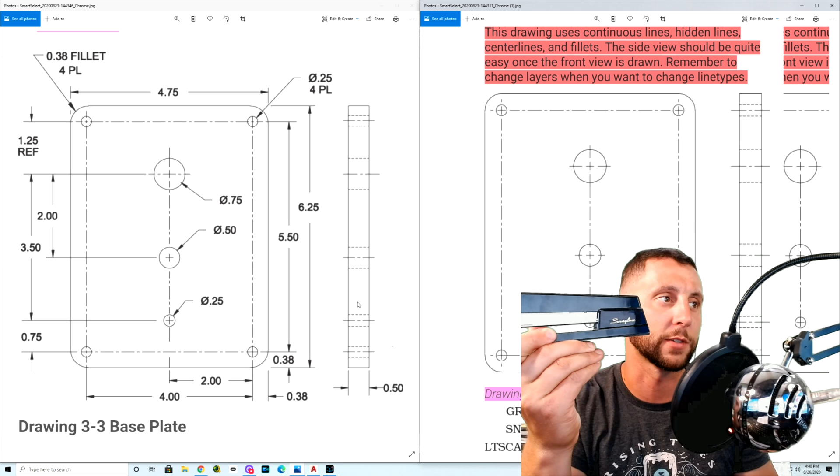This is a project that's using orthographic projections, okay? What that means is that we have the front of the object and we're going to draw the right of the object as well. So if I were to use this as an example, that would be the front side of my stapler, that would be the right side. Now hang on, I'm worried my camera is facing the wrong way, but basically if you have the front, to the right of that would be your right view, if you had the front, above that would be your top view, okay?

So it would be like taking this and just kind of flipping it to be the top or flipping it to be the right. Now again, this may look like I'm flipping it left because my camera is probably a mirror, but you guys understand what I'm talking about, okay?

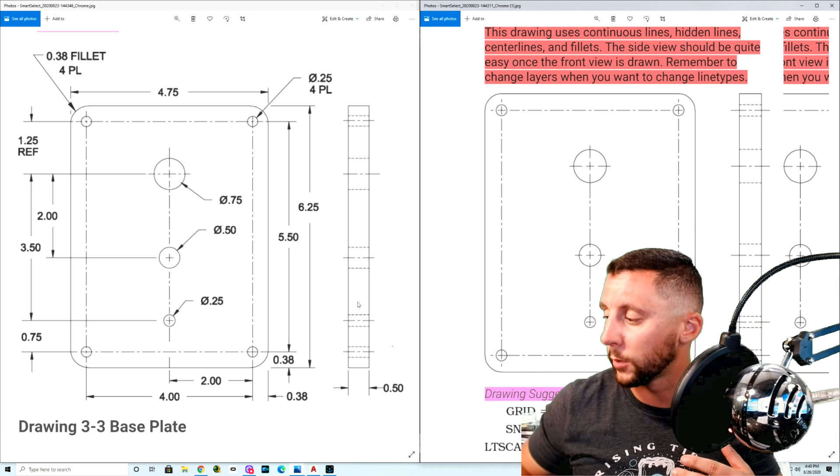Alright, so we're going to create this. We have a plan here that has all of the measurements and dimensions that we're going to need in order to make this, and we also have some other things giving us some information about what we need to do in order to create this drawing, okay? So these are suggestions. You can draw it this way or you can draw it my way. I'm going to kind of show you both and see what you guys like the best.

This says this drawing uses continuous lines, which are basically just your regular drawing lines. Hidden lines. Hidden lines are basically like, I have a drill hole here, so this is a base plate, okay? It's made out of metal. There are drill holes that are drilled through the entire base plate. So if I had a drill hole here, in the right view, the bottom of that circle is going to give me a hidden line and the top of that circle is going to give me a hidden line.

And it's showing me that this drill hole is actually going through from the front of the object to the back of the object. Now you'll notice that on the other ones you'll have one there and up top of that circle there, top of this circle, bottom of that circle, top bottom, top bottom, top bottom. Those will be the same. So you have two of them that you're looking at here and they will both line up with each other, okay?

Center lines, okay? Center lines are the lines that are showing the centers of these drill holes or of these circles. So this is a center line going down this way, that's a center line, center line, center line, center lines all the way around, okay?

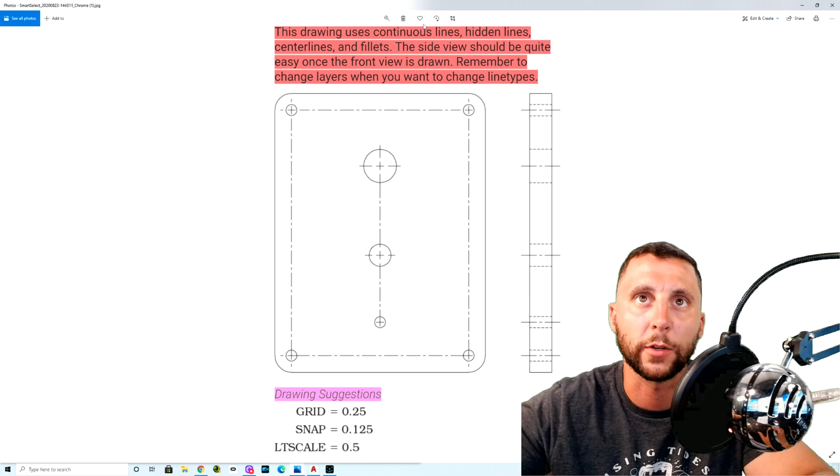Actually, there's a third one. So this one says, study the dimensions carefully, and I know you guys can read this, but I got to read it for myself because I haven't done this project yet. Study the dimensions carefully and remember that every grid increment is 0.25. Okay, so let's stop there for a second and go back to AutoCAD. What you're going to do, if you would like to draw this way, is you're going to type grid, and you're going to do 0.25.

And what that does, I'm actually going to change it back to 1. Watch my gray grid in the back here. These are 1-inch boxes now, okay? No matter how far in you zoom or how far out you zoom, they equal 1 inch, okay? In this project, it's a suggestion that you create 0.25 grids, which every one of these is 1/4 of an inch.

They also want you to use snap points, and the snap points not on the grid are exactly halfway between grid points. So that's going to be confusing right now for a second, but if we go back to this other picture here, nope, not that one, this one, it'll say the grid was 0.25, the snap is 0.125. This is 1/4 of an inch, this is 1/8 of an inch.

So what snap does, I've never done this in a video before because I don't really draw this way. If I type snap and I do 0.125, what it's going to do is, if I'm in the line or some kind of create tool, it'll skip along on basically like an invisible snap grid, and every time it snaps, that's 0.125. It's 1/8 of an inch, okay?

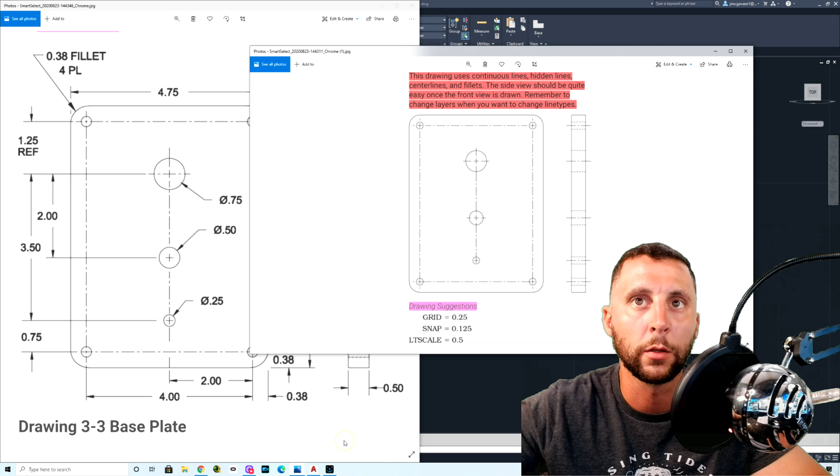Okay. So let's go back to this one again. Nope, not that one. This one. And see what else it says. So it says, and snap points not on the grid. So if it doesn't hit the grid, that means it's not every 1/4, it's every 1/8. Okay, so that's pretty self-explanatory. Alright. Let's see. Halfway between the grid points.

The 4 circles at the corners are a 0.38, actually 0.375 rounded off. So I'm probably going to create those at 0.375 over and in from the corner points. What that means is, sorry, I've got so many things open here. Looking right here, from the very bottom line of this base plate, 0.375 up gives me this center line here, and 0.375 over, which is 3/8 of an inch, is going to give me this center line here, and that gives me the position and center of these drill holes.

Okay, the outside fillets are also 0.38, but I'm going to make them 0.375 because it said that it was rounded. If, and I think her name was Christina or Christy, if this was your project and you wanted to create 0.38s, then just substitute that number in for every time I do 0.375. Okay, but I like to be more accurate. I don't like to round things. Because this is architectural type work, and as far as I'm concerned, it needs to be dead accurate.

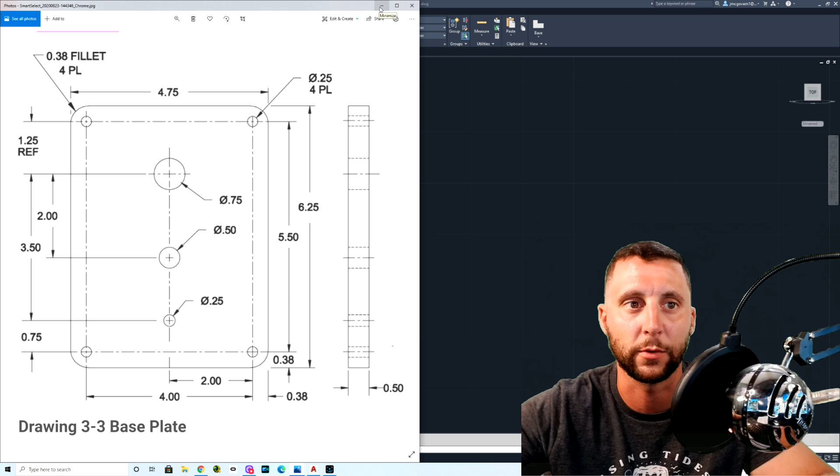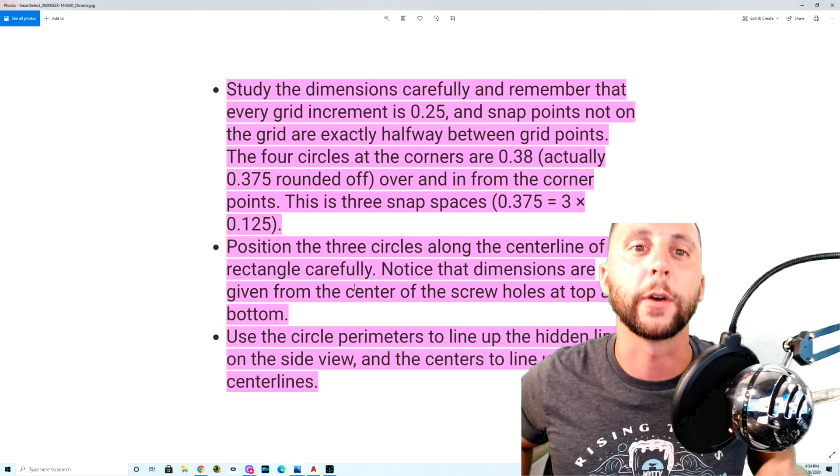All right, so let's get rid of this, and let's go back to our instructions. Okay, so over and in from the corner points, this is 3 snap spaces. Position the 3 circles along the center line of the rectangle carefully. Notice that dimensions are given from the center of the screw holes at top and bottom. Okay, so that's, again, pretty self-explanatory. Use the circle perimeters to line up the hidden lines on the side view. Sorry, my camera's in the way. And the centers to line up the center lines.

Okay, so what that's talking about is between the front view and the right view, just like I was saying before, you're going to use the edges of the circles to give you your hidden lines, and you're going to use the centers to give you your center lines. Generally, I do this center line a 1/4 of an inch past the object. Not sure what that professor is teaching, but that's the way that I do it and the way that we do it in class.

Like this right here, I would have continued that to here and then gone an extra quarter of an inch.

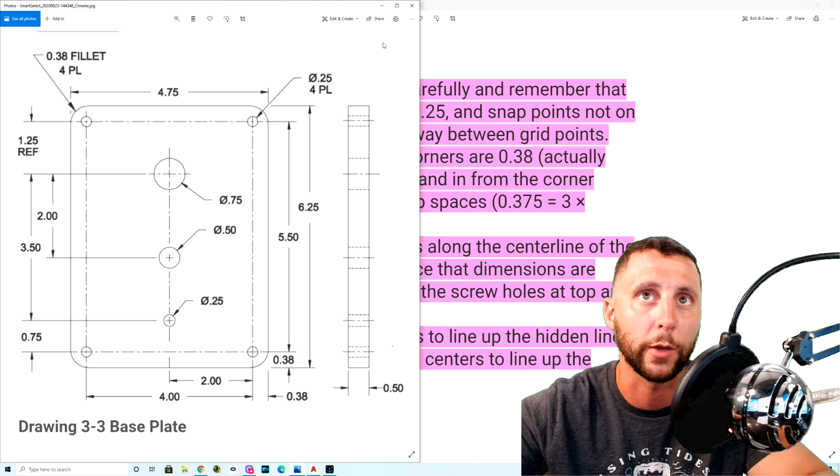Okay, so let's go ahead and start drawing. Let me see what else I'm going to need, I'll have that on my other screen and bring it over when we're looking at stuff. All right, first things first, I'm looking at the outside dimensions.

This is 4.75 by 6.25. Follow the edges of the dimension and make sure it is what you're looking for. Generally, with dimensioning, the furthest out dimension, if there's 2 or 3 lines, is usually the bigger numbers — your max width by max height. So, 4.75 by 6.25.

So again, you could do 4.75 like that, and zoom out a little bit. Now, if you're stuck zoomed in too far, hit escape and double click the scroller. That's a zoom extents, and that's going to readjust your zoom so you can zoom out a little and see some stuff.

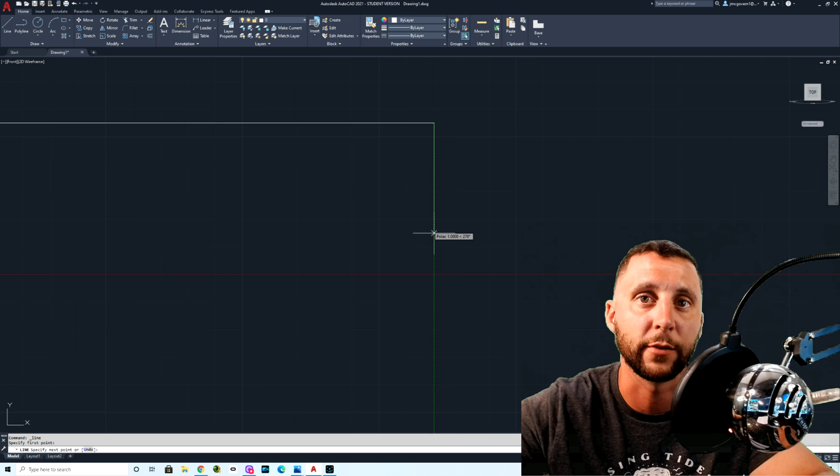Or if you really want to do it their way, and I don't really want to, but I'll show you — this is an eighth, that's a quarter, that's a half, that's three quarters, that's one inch. You can see how long this would take to do. So if I wanted to go 6.25, I'd have to keep counting all the way to 6.25 and then click my line, which I'm not going to do. 6.25. Okay, the other one again was 4.75, and then we're going to go back up and close.

Okay, next thing I would do is fillet — R for radius, or you could click radius down here, that's up to you — and you're going to make those 0.375, or 0.38 if that professor is looking for you to round things. Then you're just going to click from here to here, hit spacebar, that brings you back in, here to here.

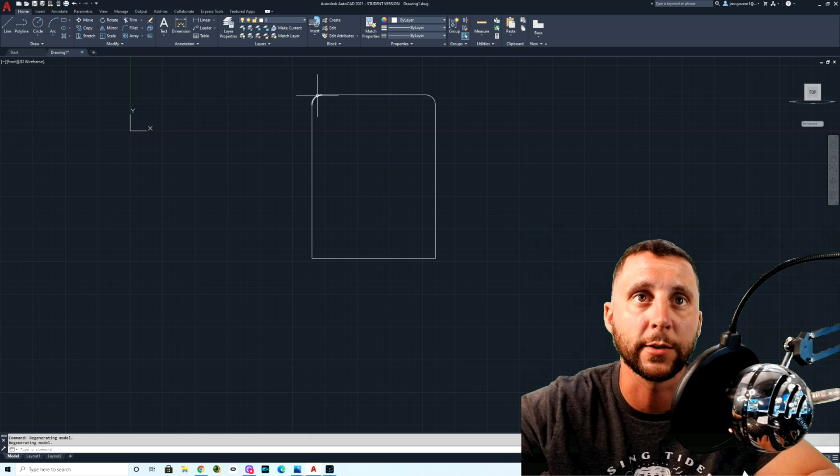By the way, I'm just zooming in and out on the scroller. I'm clicking and holding on the scroller to pan, and then zooming in. The cursor will zoom in to where your cursor is when you're scrolling up on the mouse.

All right, so back down here, fillet, radius, 0.375. Here's another fillet trick — if I just hit multiple, then it will allow me to do 1, 2, and I don't have to hit spacebar now. I can just keep going around, 1, 2.

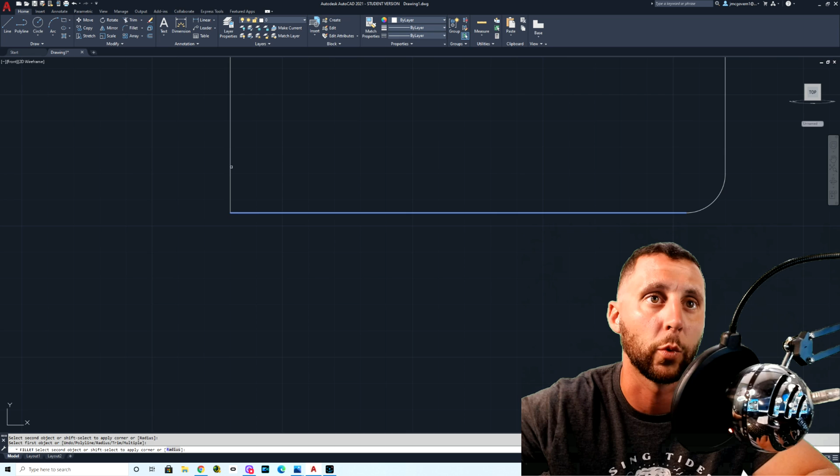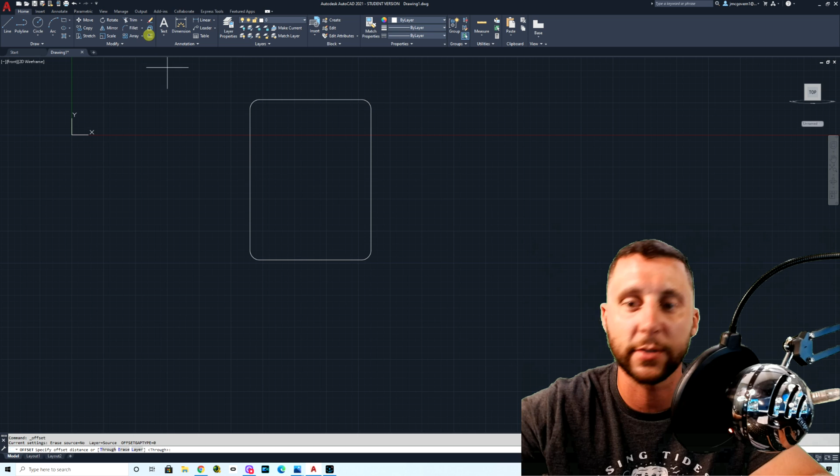Let's do an offset. Oh, by the way, there was another suggestion here that didn't really matter yet — it says we did grid, we did snap, the LT scale 0.5. What that means is if I were to draw a line... okay, we're getting a little ahead of ourselves here. But let's do offset, let's do 0.375, and let's come in on all 4 lines here.

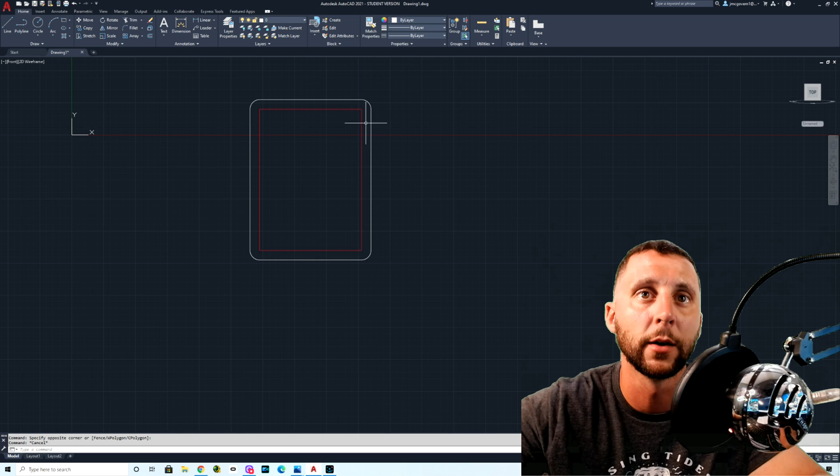You're just clicking the line you want to offset and which way you want to offset it. I'm also going to suggest — I don't want this to get too confusing — so what I might do is take these lines and change their color for right now, just so you know these are going to be hidden lines in a second. I just didn't do them yet.

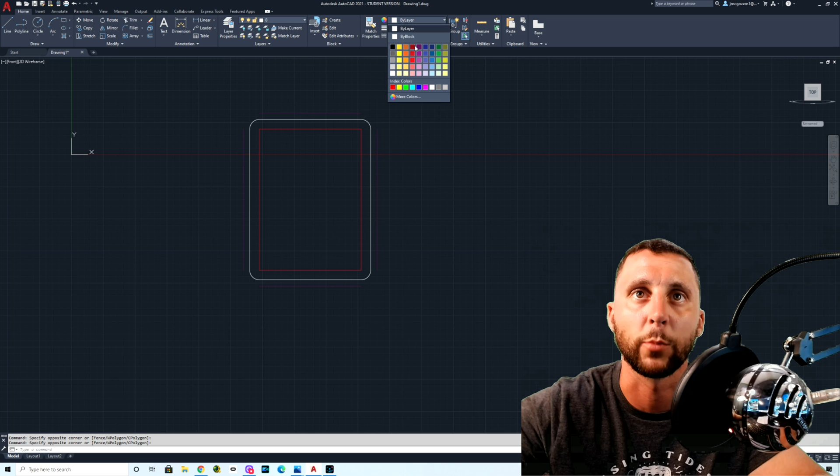Now, offset again — remember I said I like to overhang them by 0.25, so you're going to go 0.25 out, 0.25 out, 0.25 out, 0.25 out. I don't want to confuse the actual edges of the base plate with all these other lines, so again, let's just change these colors. It's very easy to change back, so why not change it so it makes more sense — those can be reddish as well.

Now, why did I do that? If I type EX, enter, and then hit enter again for extend, I can click right here and it will extend — that's called a quick extend. It will extend to the closest object or closest line, and if I do that twice, it will go to the next one. 1, 2, 1, 2, 1, 2, 1, 2, 1, 2.

Now you could also do it this way — extend. What do I want to extend it to? This is not a quick extend, this is an old school extend, I call it. Hit enter. Ooh, I think I messed that up. Extend — what would you like to extend to? Now, why will it not let me select that line? That's interesting.

Generally, when you do this, you would click what you want to extend it to. Huh, that's interesting, I hope that's not a change in this software. That would be annoying. But if you're using any other version, you'd hit extend, and you would just click on what you want to extend it to.

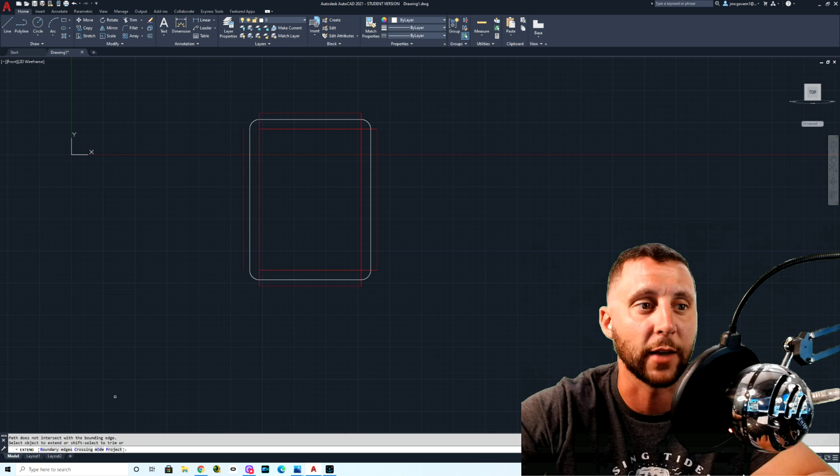You would hit enter, and then you would click what you want to extend. You could also do it this way, where you just grab the blue point here and drag it until it hits that line. That's also another way to do it.

Okay, so now these were pretty much dummy lines, we don't need these anymore. It was just to figure out where those overhangs were going to be. You can change the colors back now if you want. Go back to by layer.

The 4 inside lines are going to be a line type, they're going to be center lines. So how do we do different line types? Right here below line weights is going to be line types. If you've never done these line types before, hang on, let's just make sure we're still recording here. Good.

If you've never done it before, you're going to have to click on Other, okay? And in here, you're going to have to hit Load. Now, this is something that this professor or teacher did not specify. If I have center lines, there's Center, Center 2, and Center x2.

Basically those are different scales within themselves for how big the center lines are. You can see Center x2 really stands for 2x, it's 2 times bigger than the normal center line, which means it's a little bit more zoomed in, okay? 0.5x would be a little bit further zoomed out. So we usually use the 0.5x one, so I'm going to hit OK on that one.

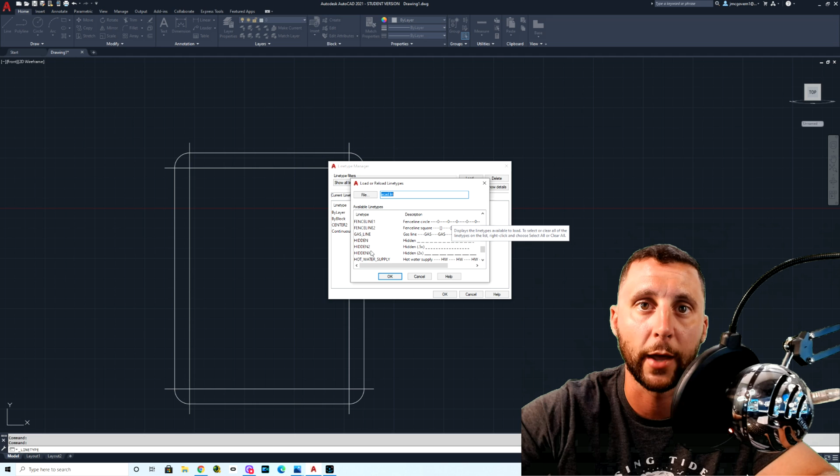I'm going to hit Load again, and I'm going to scroll down here until I see Hidden line, because I want to load that one as well. The 0.5x one, that's just the one that we use in our projects, and then you hit OK.

If you select these 4 lines, by the way, if I click and go to the left, that's a green box. If I click and go to the right, that's a blue box. Green is going to select anything that it's touching and everything that's inside of it. Blue is only going to select everything that is fully inside of it.

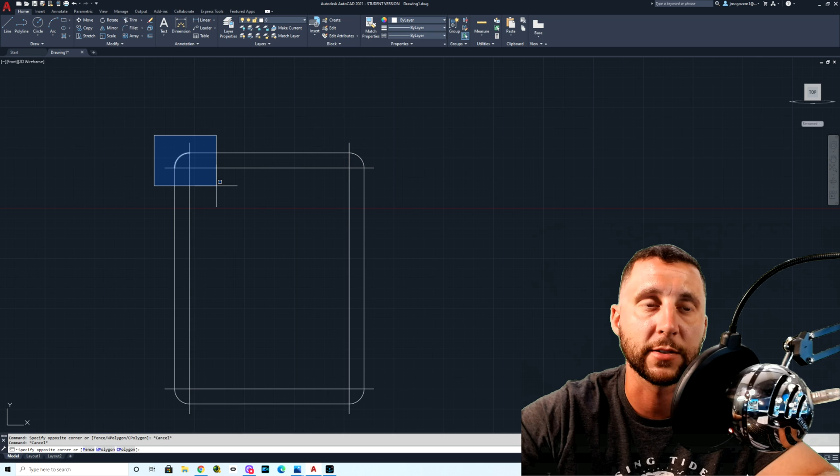Notice how this fillet is the only thing that gets selected when I go like that, because it's the only thing that's fully inside. But if I go like this, I start getting more lines. So again, what it's touching and anything inside of it, versus what's fully inside of it. Alright, so select these 4 lines.

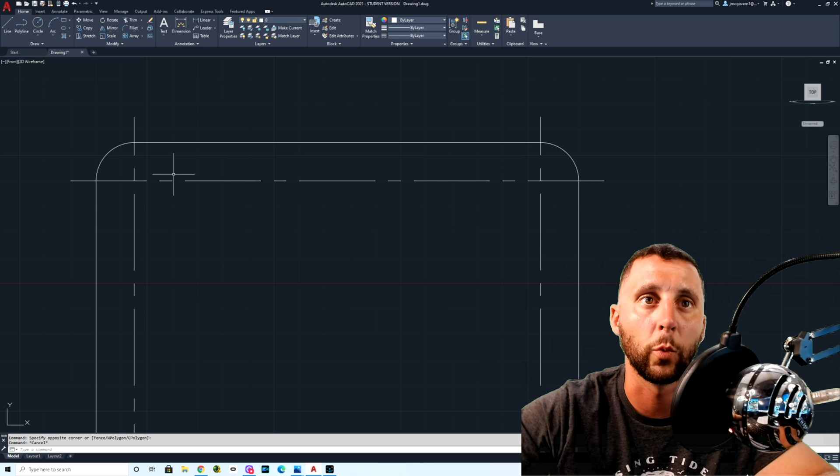Go to line type again and change that to Center. Now notice that there are 1, 2, 3, 4 dashes in this center part here. Looking back at the drawing that we were given, we have a lot more than that. So let's change our LT scale to 0.5 and see if that's the correct line type that this professor wanted to use.

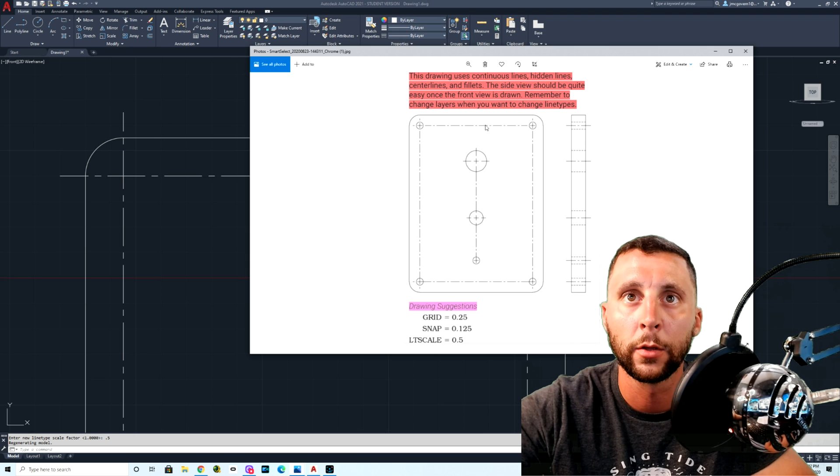Well hang on, you don't have to select anything. LT scale 0.5, and you'll notice that that changes. So it does look like it's correct now. 1, 2, 3, 4, 5, 6, 7. Perfect, so it was a 0.5x that he was using, okay, or she.

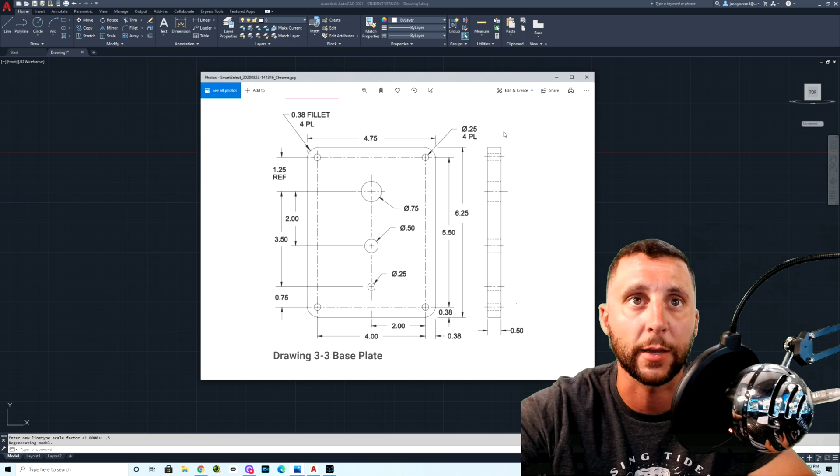Circles. Okay, now we're going to draw some circles. Looking at the drawing again, we have these little baby circles, those are a 0.25, and this stands for diameter. You'll see D 0.25, DIA 0.25, or you'll see the diameter symbol 0.25, it all means the same thing. So a 0.25 diameter circle.

What that means is if we drop this down and we do Center Diameter, we can click here and we can type in our diameter, which is 0.25. We could do that 3 more times, or we can click this one and do copy, zoom in and copy it from the center of that circle.

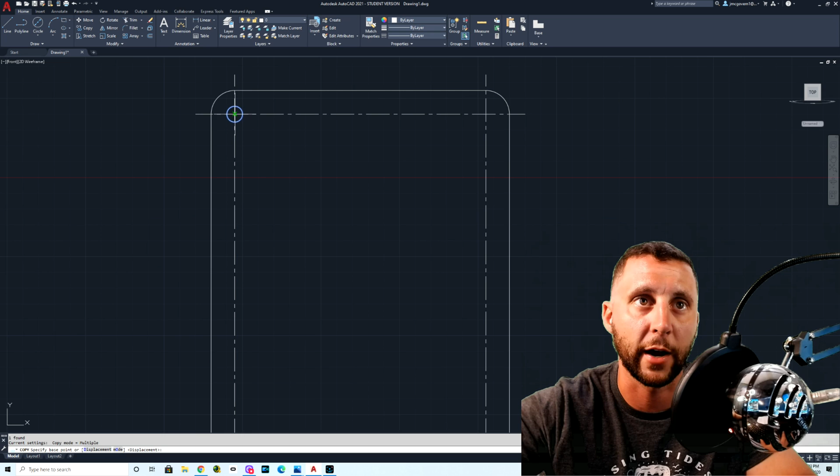If you're not getting the center, hit escape, go back and type OS, enter. Make sure that these are the ones that I always have checked: endpoint, midpoint, center, intersection. I don't really like extension, and that's pretty much it.

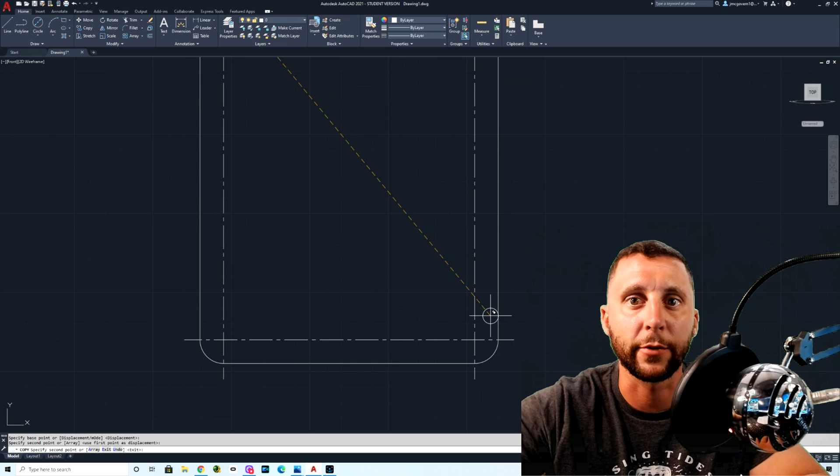So, copy, click at the center, click at these different intersections. Now I don't like how the snapping is, sometimes you get it and sometimes you don't. The snap is very close.

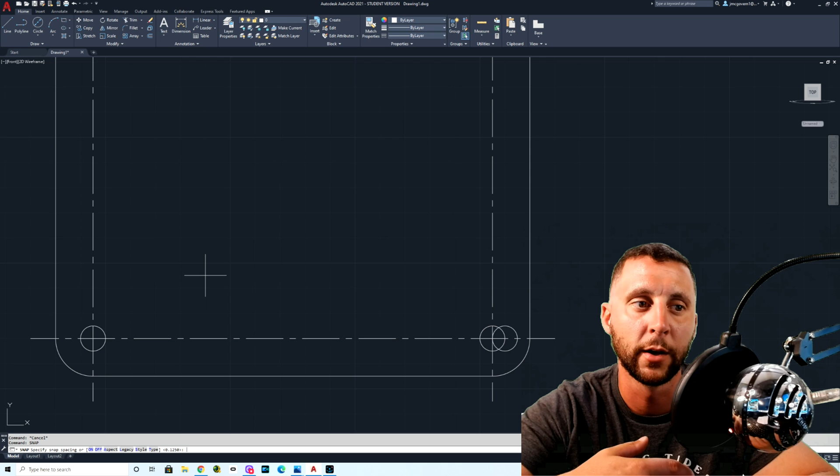Okay, so I'm gonna turn that off now because you guys know how to use it. It just takes a lot more time. It could be a beginner class, I'm not really sure. It's a good way to learn in the very beginning, but it's definitely not very productive in my opinion. I think you can get a lot more done a lot faster if you do it the way that we normally do it. Okay, alright, so delete that.

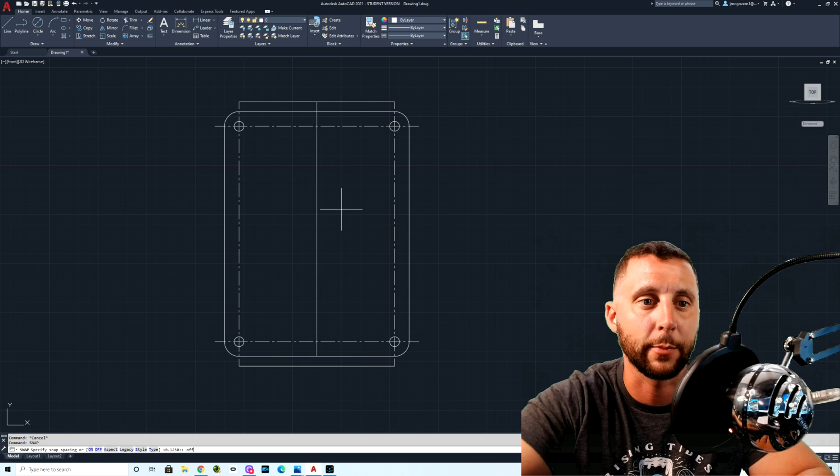Let's see, we're gonna need a line down the middle, so we're gonna go from midpoint to midpoint here. Again, I had midpoint turned on. I probably should have done this before when I had my 0.25 offsets already figured out. This can go to there, and again I'm just going to turn snap off, that's annoying me, and bring this one down to here, get rid of the lines.

Okay, so going back to the drawing again, now see this is, okay, in this picture they have it 1/4 of an inch past the circles, so we can do it that way, that's not a big deal. Let's draw our circles first and then I'll end up trimming that.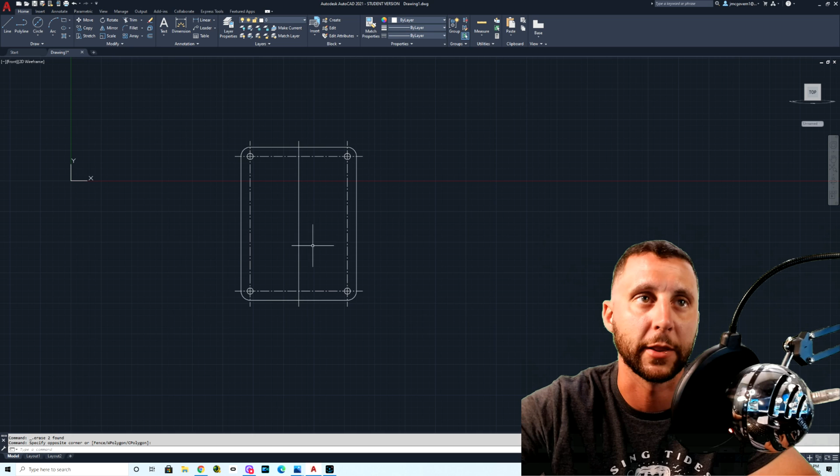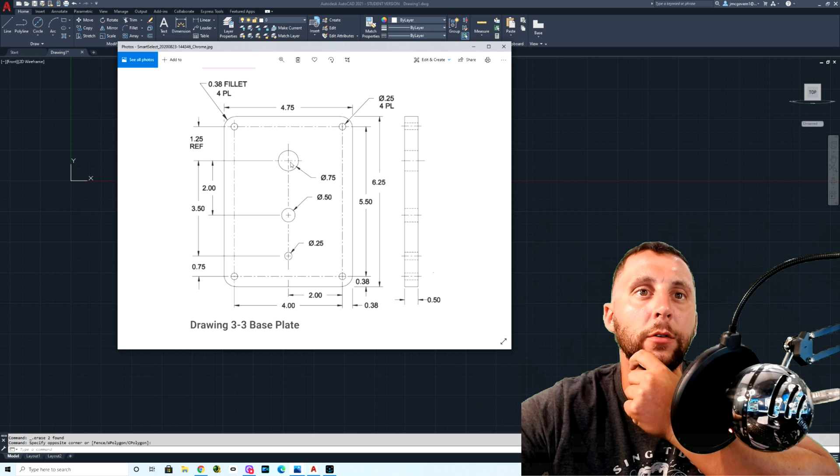Okay, this one circle is, let's see, where is the position of this? From this circle 1.25, from that circle 3.5, from this circle 2. Okay, so I'm gonna do an offset of this line 1.25, 2, and then 1.5 because I'm just doing 3.5 minus 2 here. Okay, so 1.25, 2, 1.5.

1.25, this is an offset. Notice how when you offset a center line, it's going to continue to be a center line. Escape, spacebar, 2, enter. Escape, spacebar, 1.5, enter. Spacebar just brings you back into the tool that you were just in.

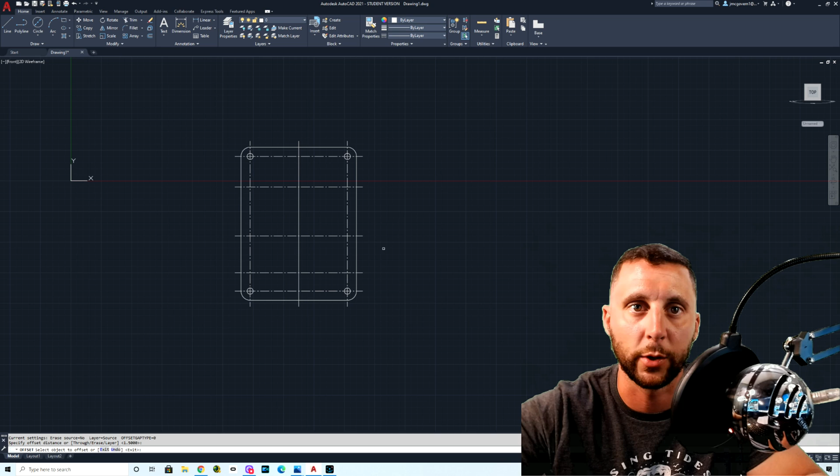With offset though, you still have to type your distance of what you want. Although if I did spacebar and I hit enter, it would just give me the same offset that I was already using. Okay, so now let's draw some more circles here.

This one actually is going to be a center line as well, so let's make sure that that is center 2. We're going to draw some more circles. This one is a 0.75 diameter, 0.5 diameter, 0.25 diameter.

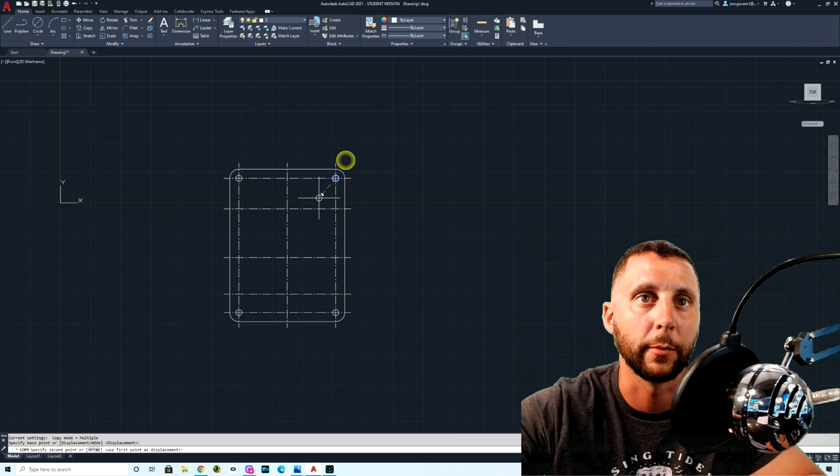We could just steal one of these again, copy, grab it from the middle, put, oop, that goes there. We have another diameter that's going here, and that's a 0.5. We have another diameter up here, and that's a 0.75. Alright, so those circles are done.

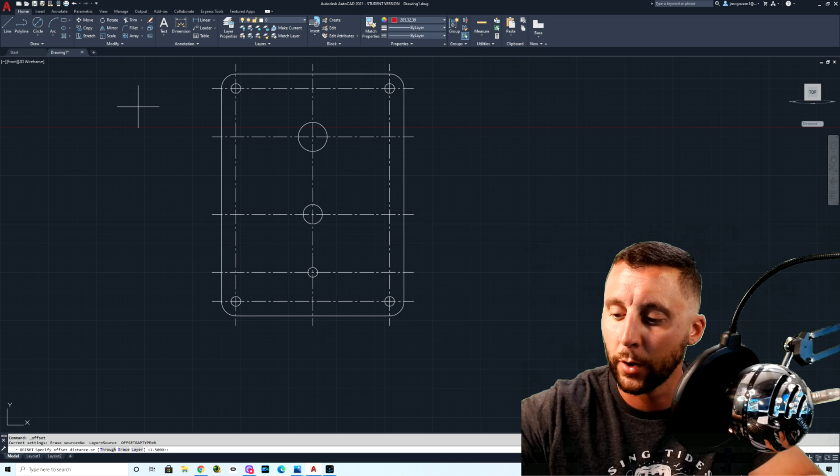Now, I'm going to change my global color right now to red, and I'm going to do offset of 0.25. The red lines are going to be things that I'm going to erase later. Now, that should have created a red line. That's interesting. When you create new things, it would make it red. When you offset it, it's just going to match the properties of what was there.

So that's not a big deal. I guess you don't have to change this. Leave it as by layer. But notice how if I did have that set and I drew a new line, it would make it red. The offset is just going to copy what was already there. So that was a mistake on my part. I'm sorry about that. Offset again, 0.25.

0.25 out, 0.25 out. Now let's change colors just so that it doesn't get confusing. These three outside circles are going to be red. They're going to get erased.

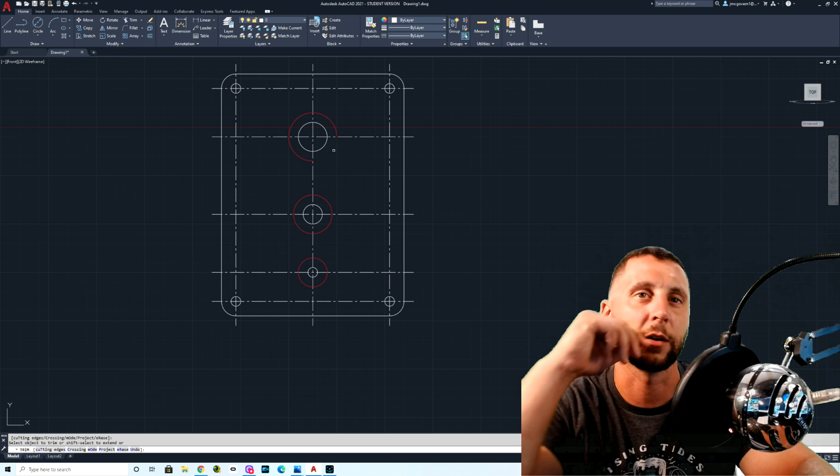I'm going to trim and I'm going to click. Oh, they changed something. I don't like this. Notice how I said there wasn't big changes, but I didn't realize this until now. Immediately starting with the trim command is a quick trim, and I don't like that. Whereas when you hit enter, that's also a quick trim. So it's just something to get used to, which is fine.

But how do you do the other trim now? That's what we need to figure out. This is only if you're using 2021. Everything before this is not like this, okay?

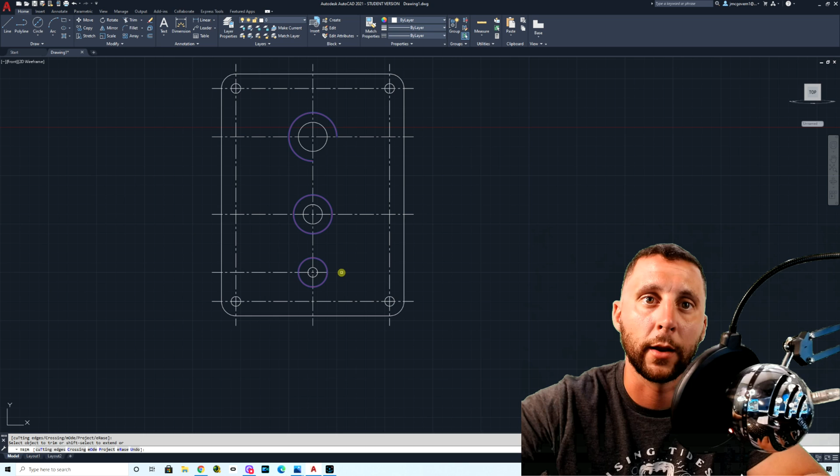Cutting edges. Select the object. Yeah, okay, you gotta hit cutting edges now. That's annoying. Hit enter, and then click what you don't want. Oh, that line is supposed to stay.

That one, that one, that one, that one, and that one. 1, 2, 3, delete. I don't like that about the trim tool. It's going to take some getting used to, but you know, that's what happens. They change stuff. Okay.

Alright, so where are we at here? This looks pretty good. I think we're done.

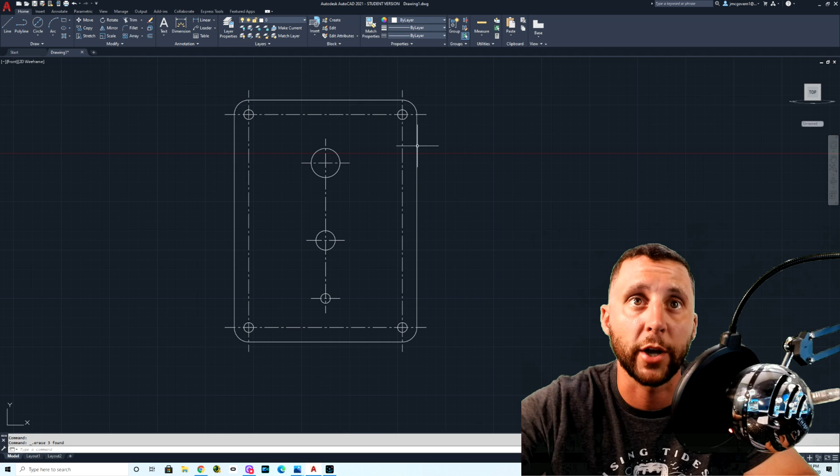This is just saying that there are 4 of those circles. There's 4 of these fillets. We looked at that. If you want to double check and make sure, you can say, okay, from here to here, it's 5.5. Double check that with the drawing. Whoops. 5.5. You can do that all around. That's up to you. If you want to put dimensions on here, I'll put 1 or 2.

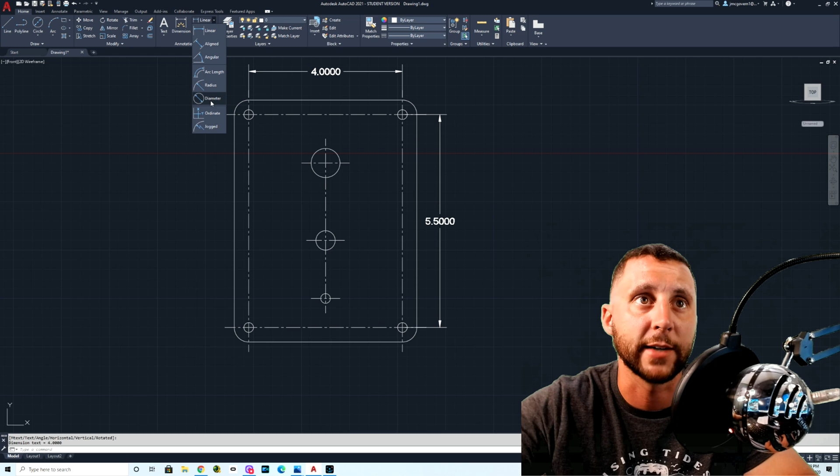That was just a linear dimension. You're just saying, hey, from here to here, and then you just go out and click. That's 4. If you wanted to do a diameter dimension, you would click the circle and you would just say where you want the text to be. Notice how you get that little thing there. If you don't like that symbol, double click on it, click back inside. Sometimes you can't click in there, so you have to actually arrow over. And then see how it's still highlighted right now.

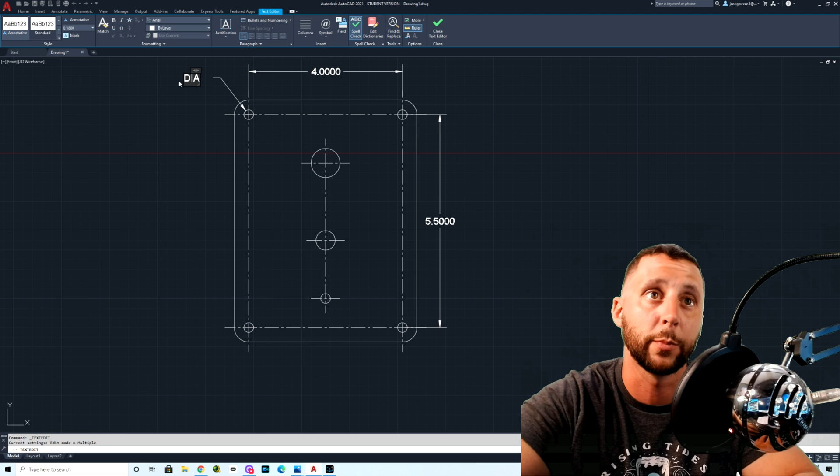I don't like that, because you should be able to just change this part, but you can't do that. You have to change the whole thing. So you could put DIA 0.25 inches or whatever you want to do. Notice how in this drawing this is just 4.75, and sorry, that was supposed to be the outside. But look at these numbers here. They are just 4.75, 0.75. They're not fractional. They're still decimal, but they also don't have 4 zeros afterwards. I want to keep that.

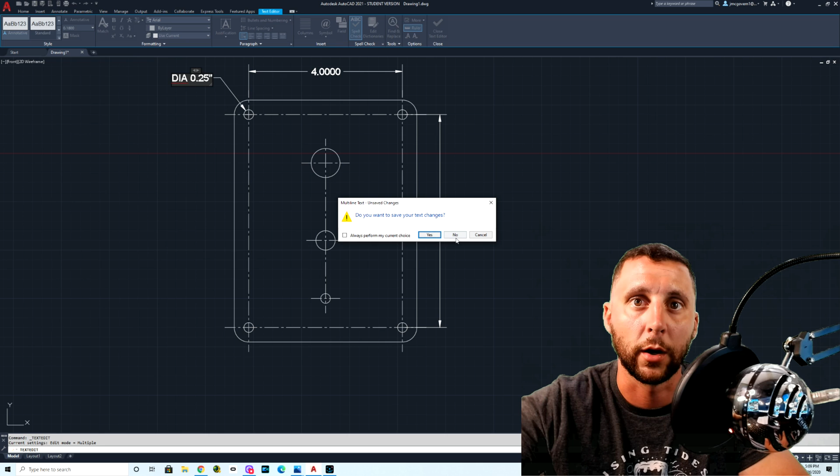So what that means is we have to go into our DDIM settings. We have to hit modify if we're trying to get it to look exactly like that drawing. Symbols and arrows, I would make this 0.25. Center marks none, because we made our own center marks. We don't want to have the system put in its own center marks, because then there's going to be 2 center marks, and it's not really the same. It's better to do it by hand like we did it.

Text height 0.25. This is just the numbers that we use. Fit, always keep text between the extension lines. What that means is that if there's a really small dimension, sometimes it likes to put the number outside and point to that area. I don't like that. I like to put it in there anyways, even if it doesn't fit, and then we change that number to be a little bit smaller if it doesn't fit.

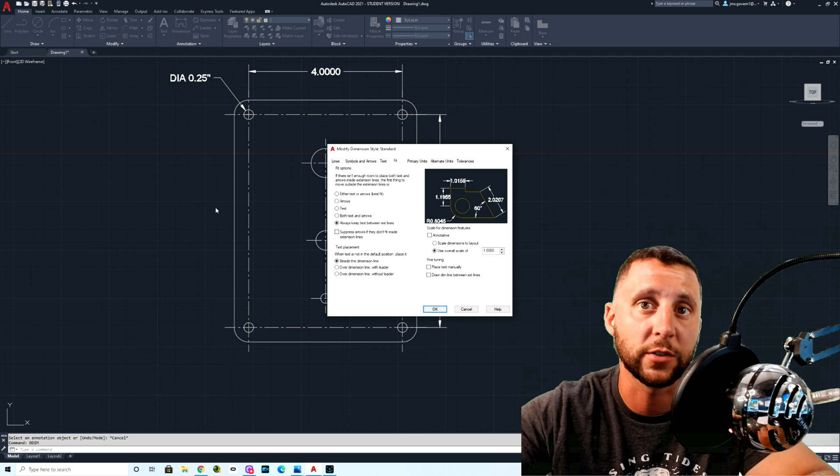Primary units, decimal's fine, but it looks like we're set up like this with rounding. So that's probably why that drawing says 0.38 instead of 0.375. Then hit OK and hit close. All right, so you notice everything is fine now. So that's done.

How do we do the right view? This is going to be pretty easy. You just need to figure out what the depth is. Whoops. Let's go back to this. It gives you a 0.5 depth. And it's going to be the same height. Let's see, the stapler is not a great example. Well, okay, we'll use it.

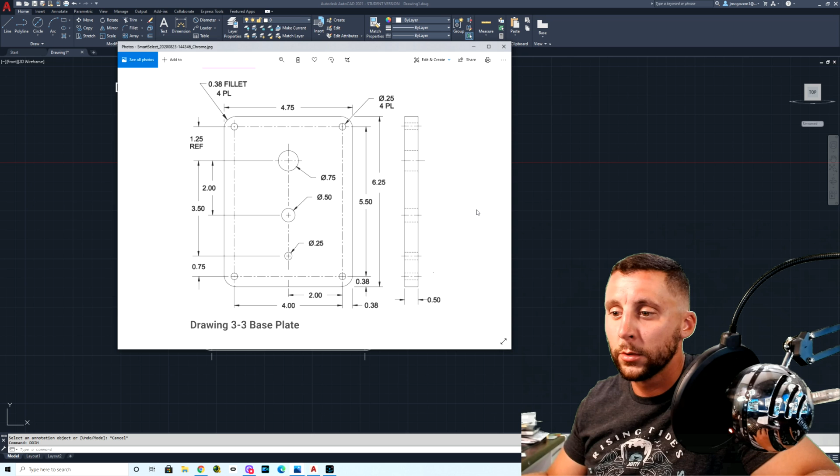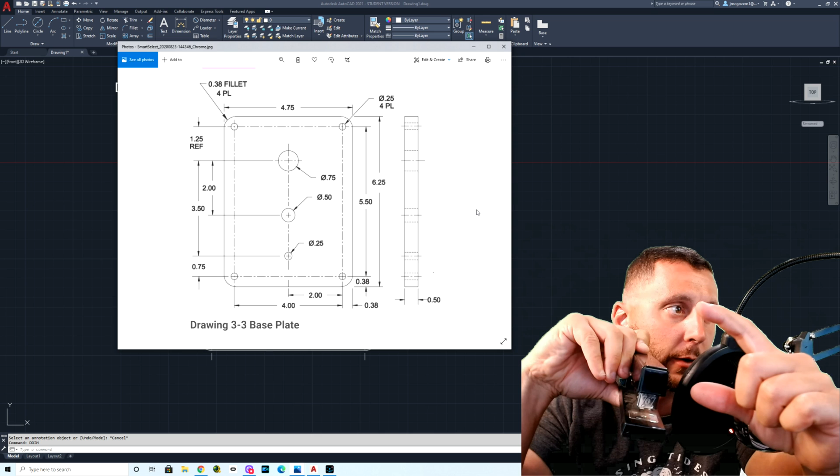So, with that being said, leave a couple inches between here. Maybe we'll do an offset of like 3 inches off of this line, and that'll be our first one here. Notice how that line does not go all the way to the top. So what I'm going to do is drag a line here and drag a line here and do EX enter. Now I think this is also the same thing as trim. You would have to click boundary edges if you want to use the trim, the extend, the way that I was trying to explain earlier. But we can do a quick one because that's actually easier right now.

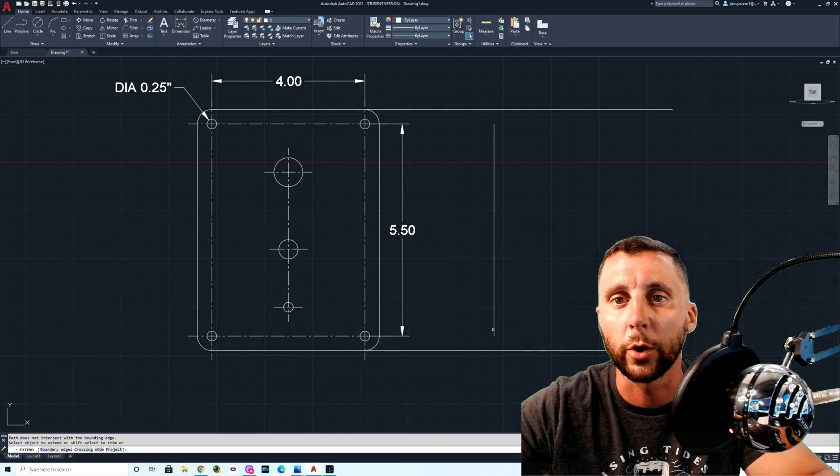So there is no extra enter to hit, which is going to be confusing because I'm making my videos on 2021 and my students are using 2019 or something like that in class. Now let's get rid of these lines. So we said from here 0.5, it's going to go down, I think it's 6.5. Nope, that's not right.

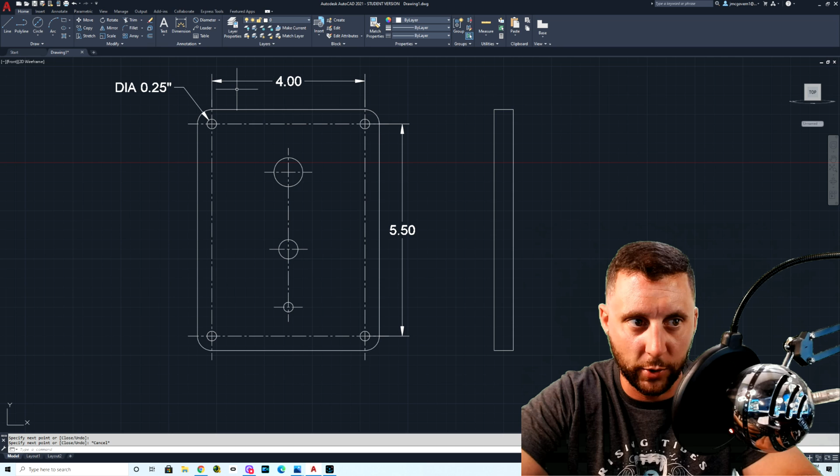6.25, and then back over. Okay, so you get something like that. Now there's a couple different ways to do that. You can do X line, and you could go on this intersection and then go to the right and click, and I can hit spacebar twice. One of them gets me out, one of them gets me back in. Space, space. That's giving me my 3 positions of those lines, right?

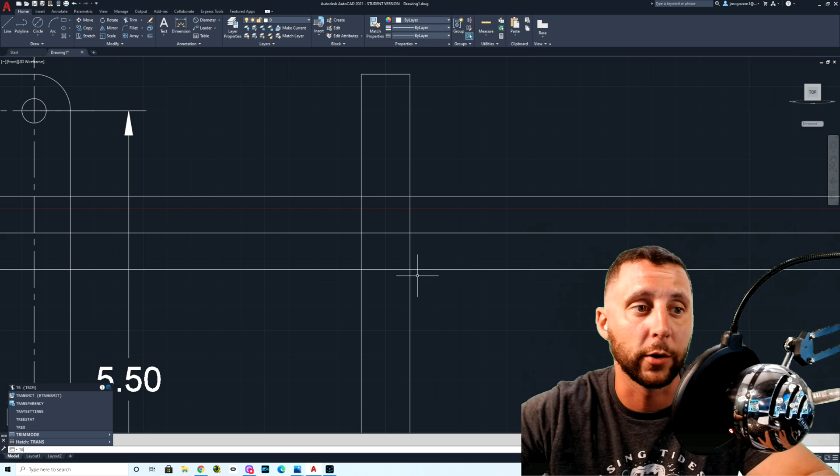So again, now this is a situation where I would not want to do a quick trim, because if I was doing this regular quick trim and I'm clicking here, notice how it's taking those lines out and this looks nice, but it leaves all this over here. So that's not what we want. We want to do the trim cutting edges, click, click, enter, and then those, why is that, oh, they changed that too. I like the box.

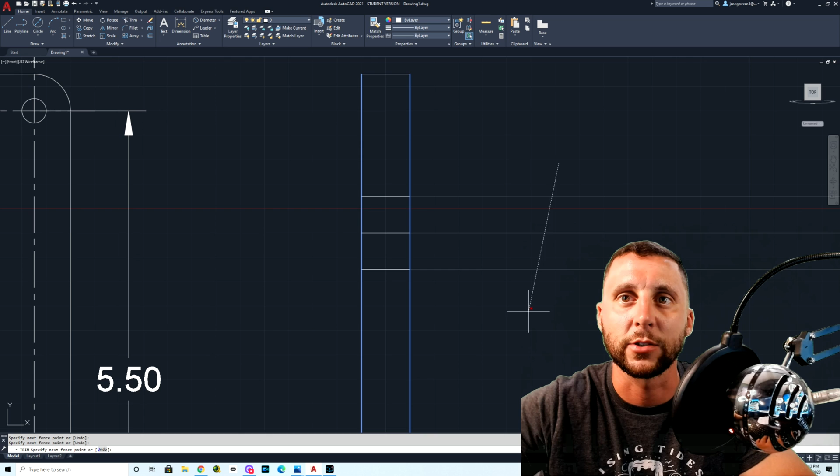That's okay though. I'm starting to get upset. I don't want to get upset on camera. But this is just typical. They always change things. It's fine.

It doesn't matter. Okay, so let's do an offset of 0.25 because the center line is going to overhang the right and left by 0.25. Again, if you get confused by these lines, change the color, and then you're going to erase them later anyways. EX enter is already a quick extend. But if you're using 2020 or earlier, you're going to want to hit an enter there to make it a quick extend. So it would be EX enter and then another enter. That would make you a quick extend. Okay? So left side of that line, right side of that line.

Okay? Now, get rid of these. What I'm going to do is, let's see, how can we do this? Yeah, we'll wait until we get them all and then we'll do our line types. Okay? So, X line. By the way, you don't have to use X line. You could start a line here and just draw it like that. Just stay on the green line. If you're not getting the green line, that is F10. F10 has to be on, okay? If F10 is not on, you don't get that green line. F10 is on, you get the green line, okay?

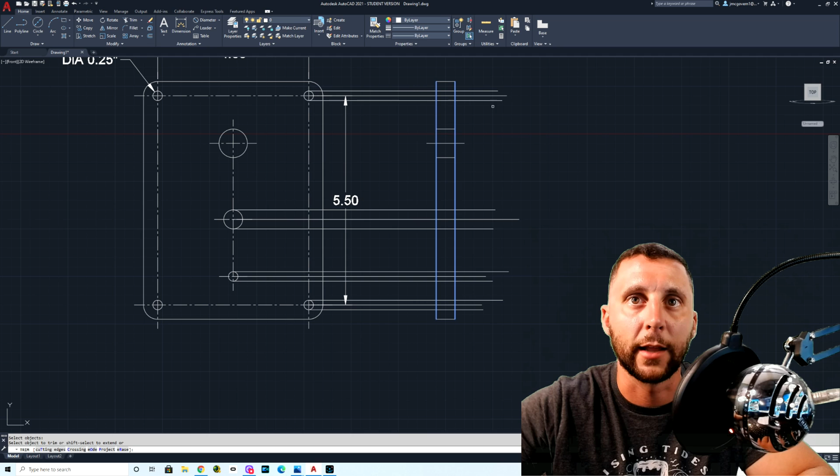Get those. Now there are a lot of lines here. If this is confusing, do one at a time. Alright, trim. Again, 2020 or earlier, you're already good to go. You're going to click right and left, hit enter, and then start clicking these lines out here to trim them off at those edges. 2021: cutting edges, right and left line, hit enter, go like that. You'll see a green box if you're using 2020 or earlier. This has the line now. I think I missed one. You can drag that back.

Okay, now we should have left those red lines, so let's do 0.25 again. This is gonna be a long video. I'm sorry, Christina.

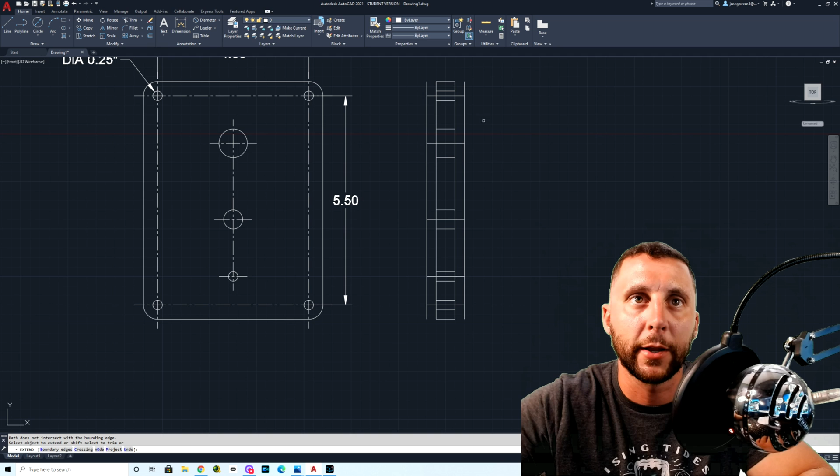And offset, no, I'm sorry, extend all the center ones. Again, it's showing what is happening in here through the object. If I didn't have any of these lines, it would be like the right view is explaining just a solid object, but it's not a solid object. It's an object that has a lot of drill holes in it, and you have to understand from the right side that there's something going on in there that is cut through the entire object all the way from front to back. Okay. Did I miss one? 1, 2, 3, 4, 5. We're good. Again, these could be red if you want. Delete them.

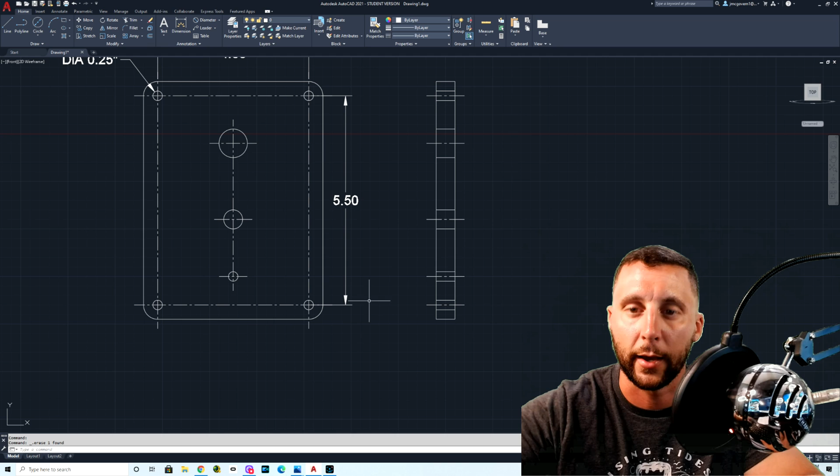All right. Now, 1, 2, 3, 4, 5. This is going to be line type. Those are going to be center. 1, 2. There are no hidden lines in this view because there's nothing happening here that we can't see in this view. As an example, if I had a drill hole over here that went through the entire object from right side to left side, meaning we can't see it from this view, you would have top hidden line all the way across, bottom hidden line all the way across, center line all the way across. That's if it went all the way through. Okay, but we don't have anything like that. So there are no hidden lines on the front view, only on the right view because we're describing these drill holes to the right.

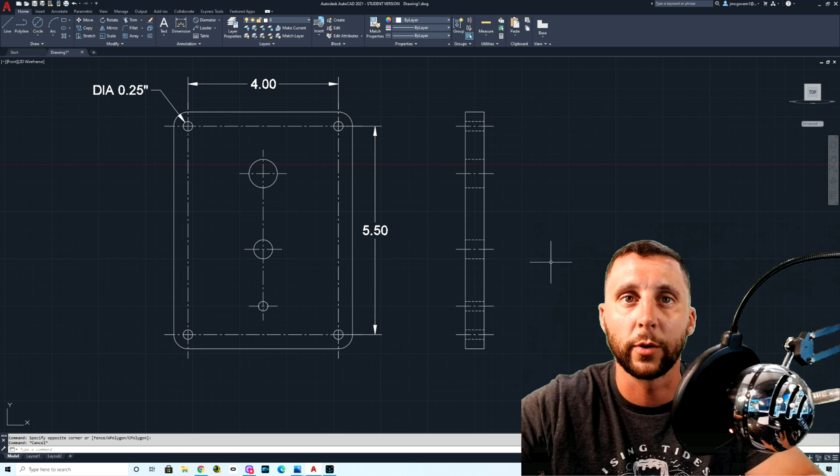Okay, so again, 1, 2, 3, 4, 5, 6, 7, 8, 9, 10. Go to line type, change to hidden 2, and this drawing is now done. Okay, let's see, should we make a 3D model? Yeah, we should. Okay, get rid of the dimensions. So this would be done. You would save this, you'd print it, you'd do whatever you're going to do. I would probably put some line weights on there, but that's just me. If you want to put line weights, you can just click whatever you want to be a little thicker. This is the actual base plate. This is the outside of it.

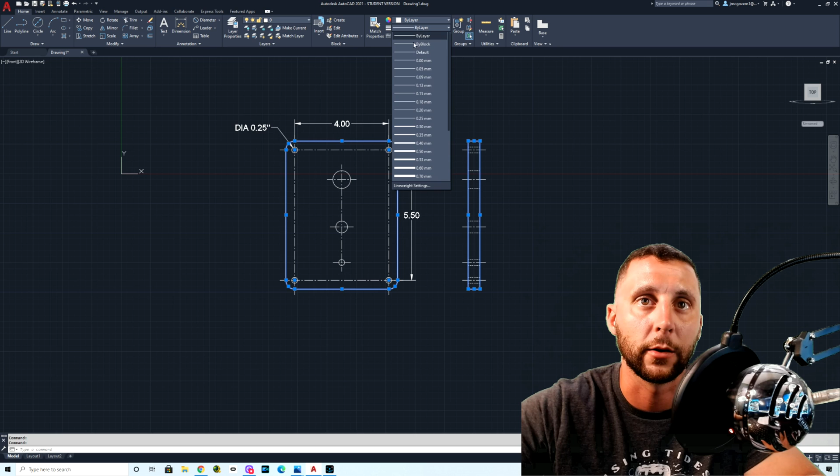And that means that they're going to get thicker lines, whereas the center lines and hidden lines, they always stay light. Okay, so you can click those, go to line weights, and you can click on, like, 1.00, 0.7, whatever you want. Okay, now they're not going to show right away until you turn that on.

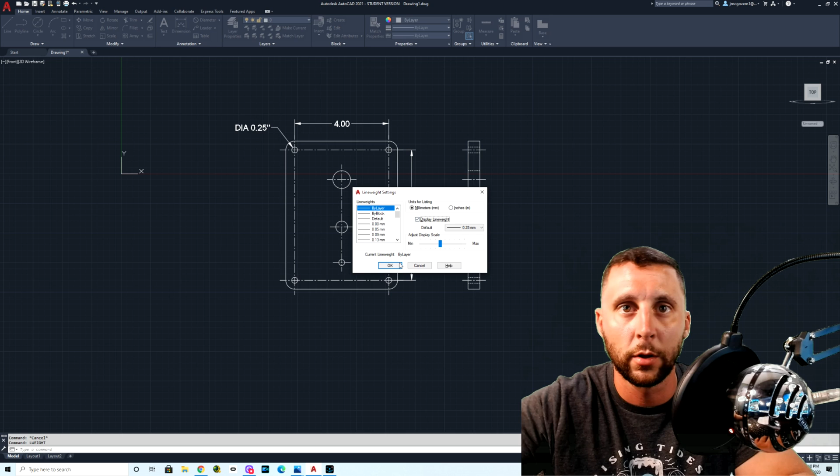And it is summertime, and I'm forgetting off the top of my head how to do that. There is something down here for that. It is show hide line weights. I don't see that down there, so let's go to LWEIGHT and do display line weight and hit OK. Okay, now there's another way down here, but I don't see it right now. That could be something else that they took away again.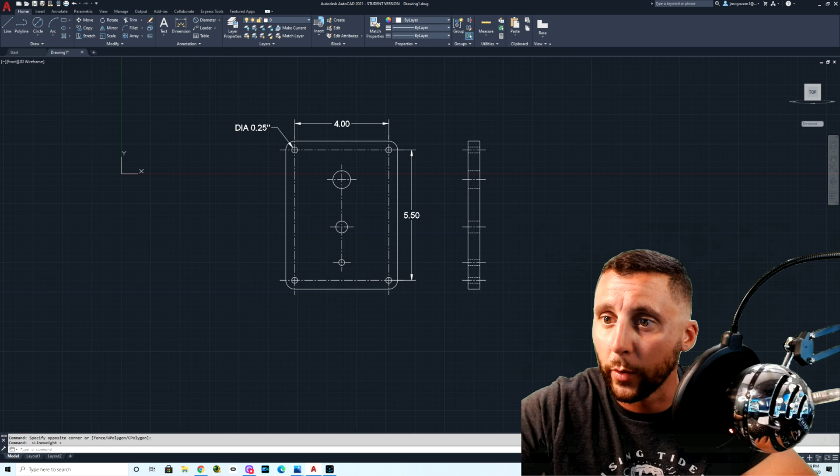You could click this for customize, and you could go to, let's see, where is it? Dynamic input, line weight, boom. That is now showing blue. Off would be off. Now it doesn't delete the line weights, it just doesn't show them, okay? So that would be done.

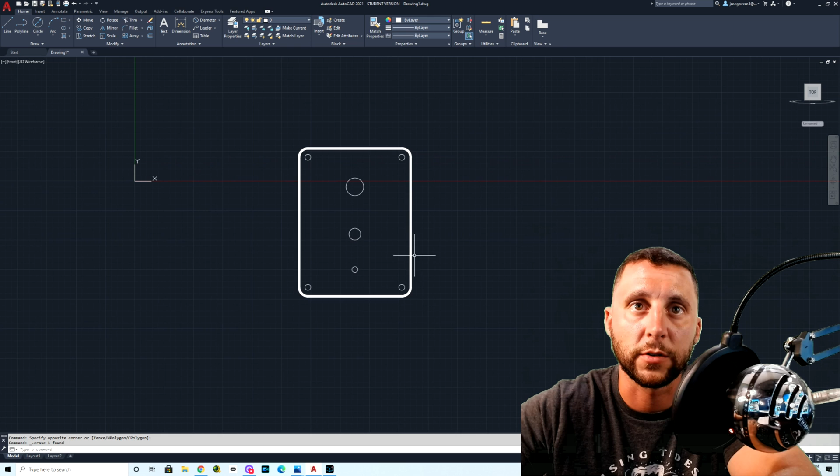Alright, now I'm going to get rid of this. Get rid of these dimensions. Get rid of everything except for the circles and the outside shape. This is just if you want to do a 3D model of this, okay? We drew this on the front, alright, because this is the front of the object.

If you drew it on the top by accident, because I didn't say that in the beginning, I didn't really think about making a 3D model, or maybe I did initially and then I didn't really think about it past that. Just select everything and do Control C and hit delete. Change this to say, like you were on the top, change this to say front, and then do Control V for paste and just plop it down somewhere.

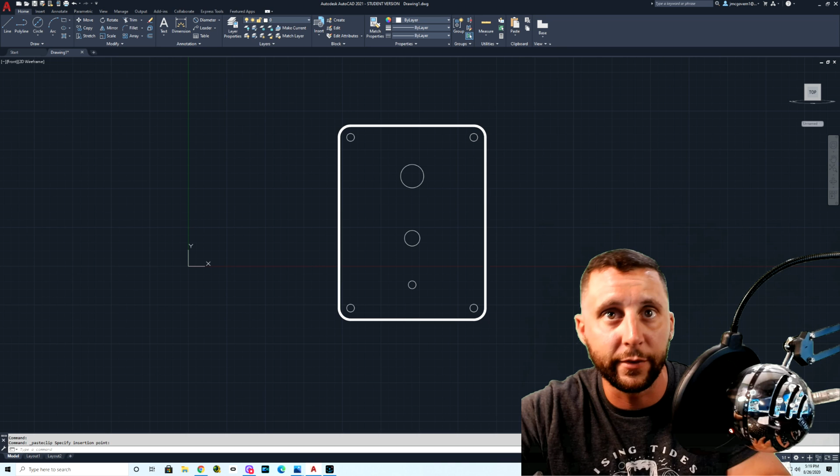Okay, now go back to the top, click the bottom right corner. This is going to give you a 3D view. Take all of this, extrude -0.5. Ooh, sorry, we skipped a step. Join 1, 2. We have to join this object to be one big polyline around the outside, not 8 different lines. Enter. This says 8 objects converted to one polyline. That's good. That's what we want.

Double check those numbers. Make sure you're supposed to have 8. Make sure you have 8. If it says 9 to 1 or 9 to 2, then there's something wrong. There's a double line somewhere. Okay? You always need it to say to one polyline. If it says to 2, that means that there's something wrong. Alright? So we've got this.

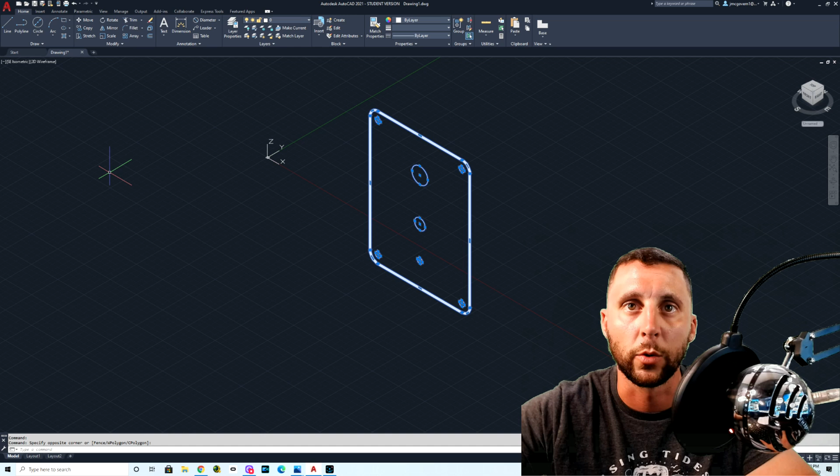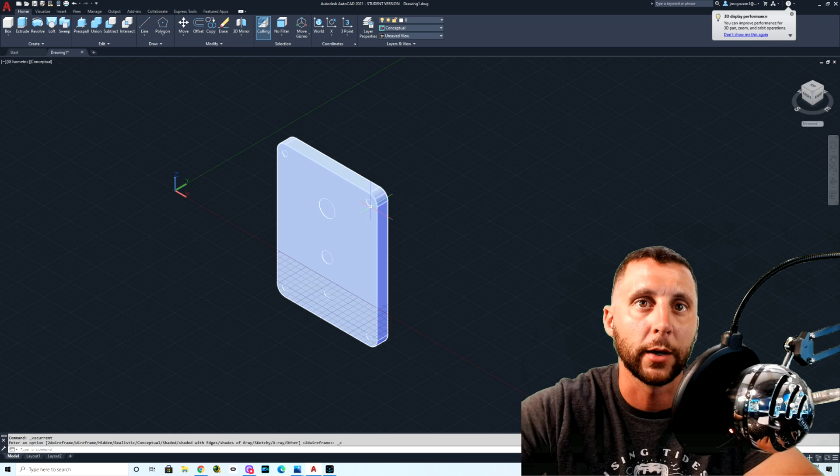We're going to select everything here, and again, you could change your 3D tools, but this one's pretty easy. Go to the gear, hit 3D Basics. Select everything, extrude or type it, it's up to you. -0.2, -0.5. And then the next thing here, if I change this from 2D wireframe to be like conceptual or something, those are not drill holes yet. They're just cylinders that are plugging in those spots that we don't want.

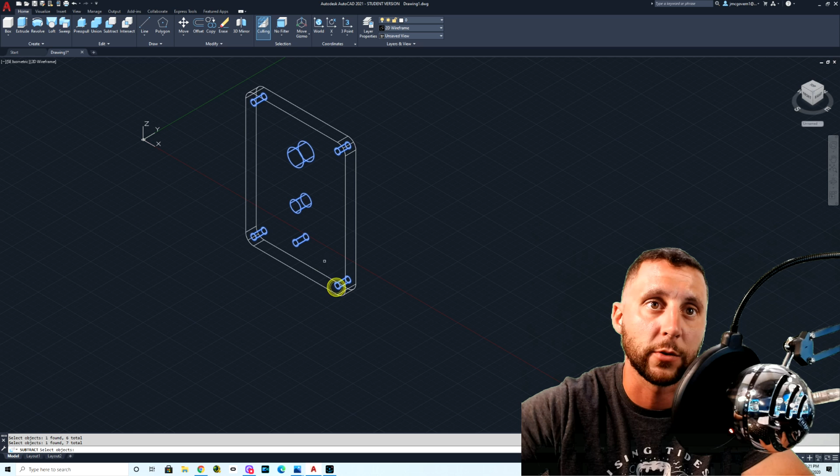So going back to 2D wireframe, we're going to do a subtract. Click the outside main model, hit enter, and then click what you want to subtract. I want to subtract all of these different drill holes, okay, because these are not drill holes yet. They're just cylinders. So you hit enter. Now, it's not going to change any of the look on 2D wireframe, but when you go to conceptual, you'll see that you now have your base plate complete. Okay, and that is it.

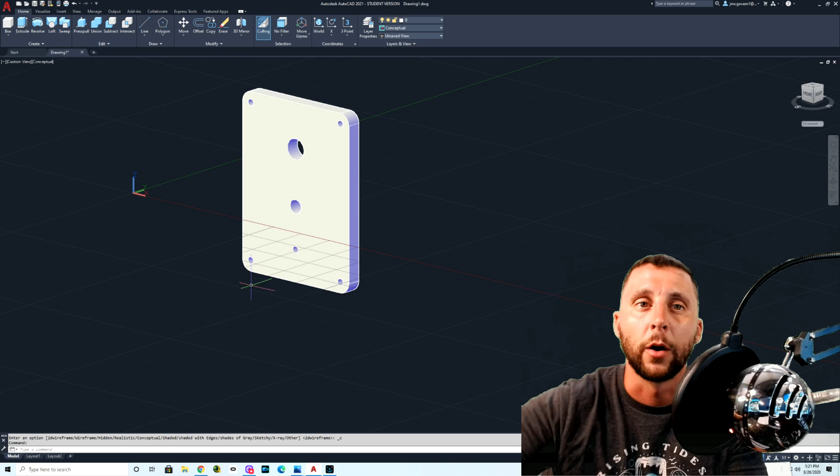I hope that this video helps somebody. I think this is going to be the start of a new playlist where I'm going to do some orthographic projections. Also, so you know, this is called an isometric view, which is basically just a 3D view. Okay, that's like when we're clicked down on that corner right there. This is isometric.